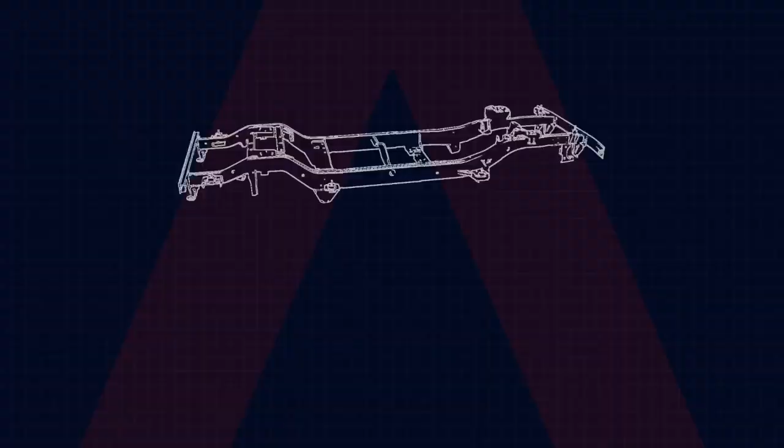INEOS say they're building the Grenadier using a classic 4x4 blueprint, so for them there was only one type of chassis to choose. A ladder frame is the only way to build a proper off-road 4x4. Ladder frames have been the basis for some of the most iconic off-roaders for over 70 years, starting with the Willys Jeep. So you could ask, why would INEOS use anything else?

We are not using a monocoque because we are not building an SUV. Strong, stiff, rugged and reliable, ready for mud, sand, rock and snow, and ideal for attaching extra equipment like heavy-duty underbody protection or winches, and anything else you need in the field. Well, that's the plan.

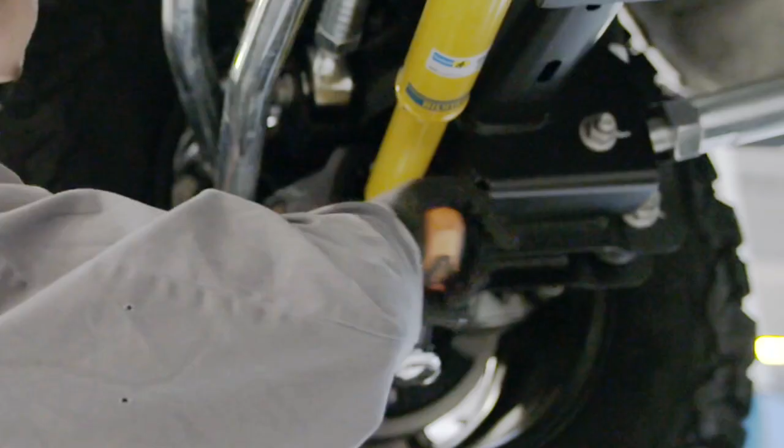INEOS is creating the ladder frame in partnership with a highly experienced vehicle manufacturing company with a proven pedigree of making ladder frames that can tackle the toughest environments. So the engineers are in no doubt at all: the Grenadier's skeleton will be a box section ladder frame. Now they'll happily give you a whole load of science and stats to explain why, but for mere mortals like us, the bottom line is absolutely clear.

The ladder frame is a super strong and really well-proven 4x4 platform that over decades has helped aid organisations, conservationists, explorers, foresters and of course farmers work harder.

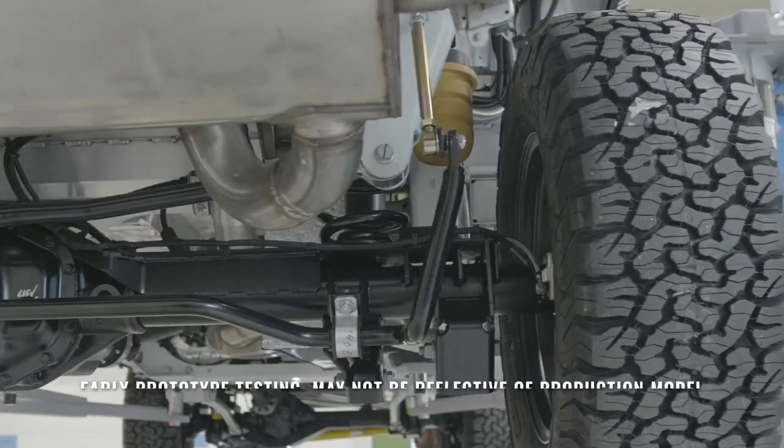For a 4x4 to get the job done, no matter how punishing the conditions, the Grenadier engineers feel that beam axles front and rear are essential. Beam axle is the most robust design we can provide for this vehicle.

INEOS looked long and hard for the right supplier for the Grenadier's axles. They chose Carraro. Why? Because of their long history building tough four-wheel drive vehicles, including tractors, making them the perfect fit for the Grenadier. As you can imagine, there's been a whole lot of debate about whether the Grenadier should have independent suspension or beam axles.

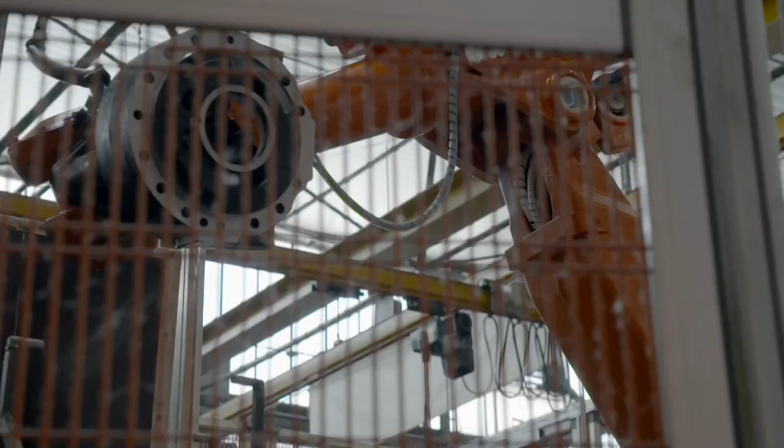Both setups, of course, have their pros and cons, but on balance, the engineers have decided that beam axles are going to be more robust, less vulnerable to damage, and ultimately much more likely to keep you going when the going gets tough.

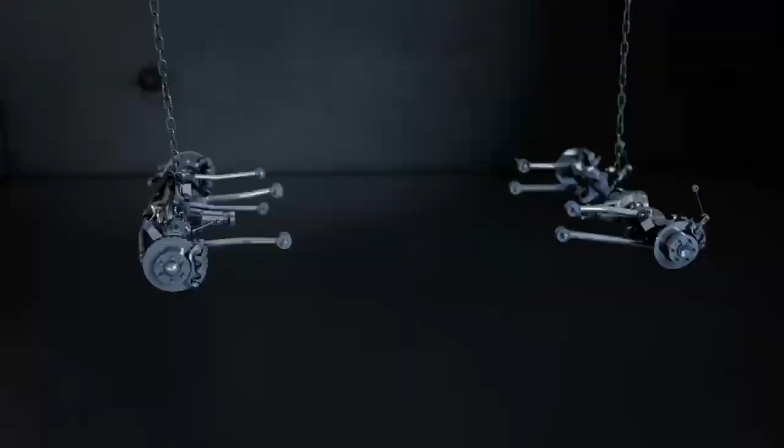Beam axles front and rear and a box section ladder frame - INEOS's vision for a no-compromise foundation to their ultimate 4x4. So the ambition is clear. They're starting with a blank sheet of paper. The Grenadier is being designed and built from the ground up. Every component chosen by engineers at the top of their game, and that's got to be very good news.

Join me next time when I'll be trying to find out more about the suspension setup.

The much talked about INEOS Grenadier is on its way, and I'm continuing my journey behind the scenes to find out exactly what the engineers are up to. INEOS has pulled together an international team of specialists to bring the Grenadier to life. There are around 60 companies already involved, and one of the key players is based here in Austria.

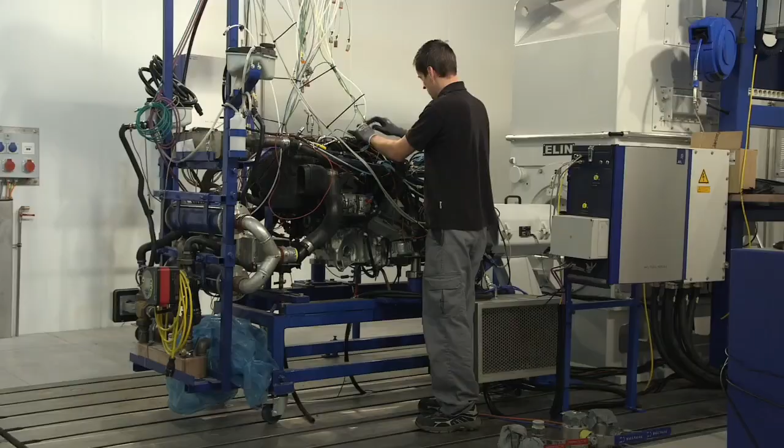Tractors, trucks, 4x4s - Magna has over a century of experience developing and building some of the world's toughest off-road vehicles. A good fit for this ambitious project.

It feels like there's a bit of a Grenadier takeover here. There are around 100 engineers working on the project and 15 in this design office, focused on creating a suspension setup that meets the needs of people who use their 4x4s for work every day.

People like Billy Milne, putting in the hard yards, looking after a large estate in the wilds of Scotland. The terrain is tough, punishing, challenging all year round. So Billy knows exactly what he wants.

An ideal 4x4 should be fit for purpose. It should be able to go where you want to put it, and it's got to have a good suspension system that rides through everything it's given. You want something basic, well set up, that does the job.

So there's a big expectation here: the best possible ground clearance, constant traction, and high axle articulation and suspension travel.

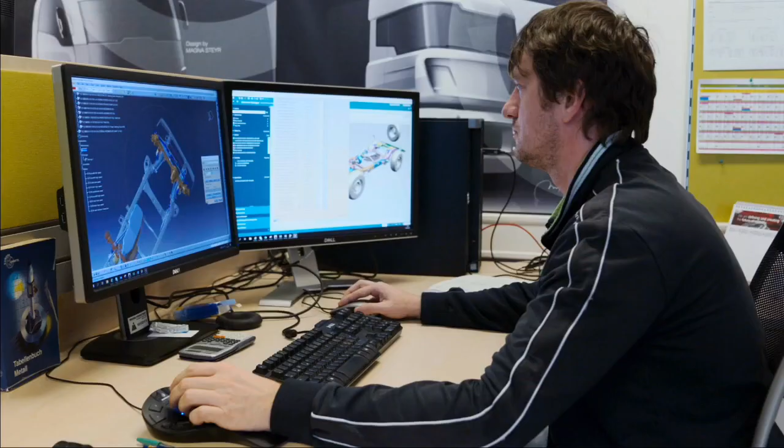So how are the engineers at Magna creating the ultimate 4x4 suspension? Well, by taking apart the world's most renowned off-roaders and benchmarking them, exploring three main options: leaf spring, coil spring or airbag, then using CAD to develop a theoretical new model that combines the best engineering ingredients to create something even better.

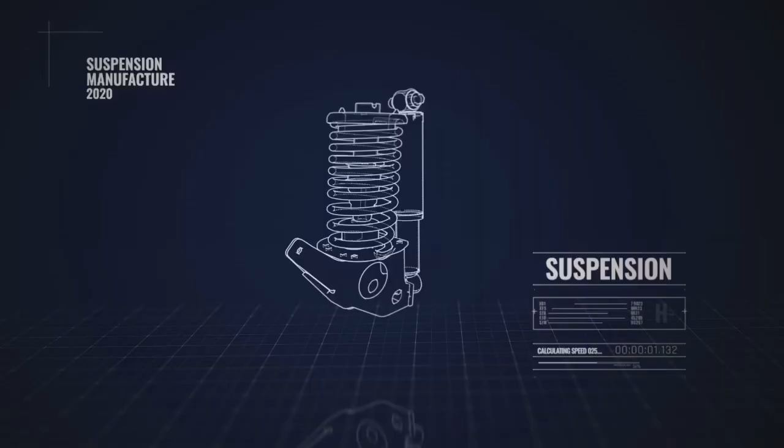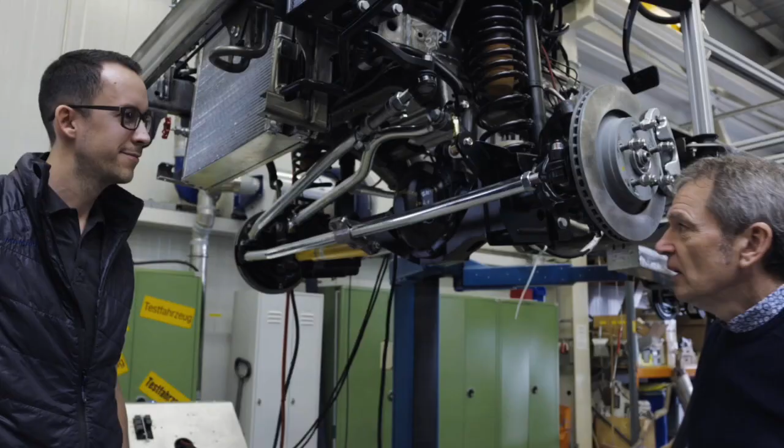And their conclusion? Well, there was only one way to go, it seems: coils and heavy-duty dampers. I met up with Magna engineer Matthias Mayer to find out more and to get an exclusive look inside their top-secret workshop.

It's brilliant to see the suspension actually bolted to a chassis, and this is the Grenadier chassis now. Yes, it's impressive, it is really impressive. You've clearly gone with coil springs here. Why? Coil spring is in our view the best option for this vehicle because we can have a progressive spring curve. This means the stiffness of the spring changes depending on the load.

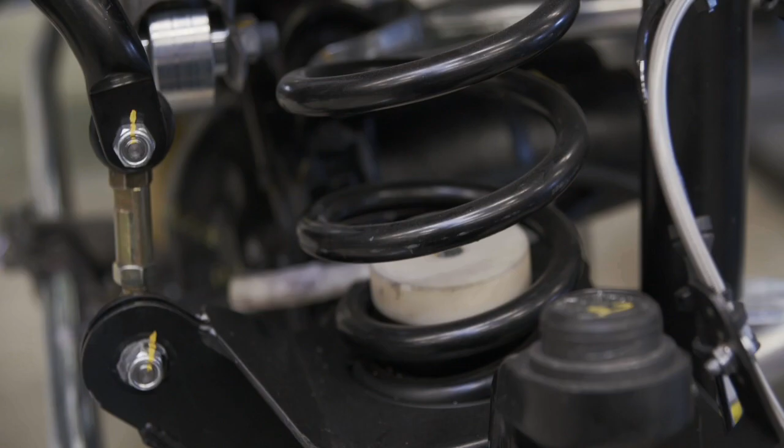Add separate dampers and huge energy-absorbing bump stops, and the engineers believe they've created a unique package. So, underneath, two really hefty big bottom links, and then two slightly smaller top links. That's right. This gives the stability against rotation in this direction for brake torque and so on, and also good stability during driving.

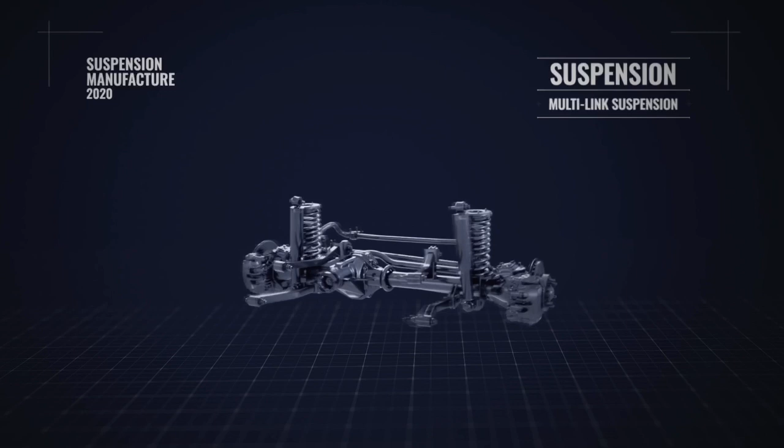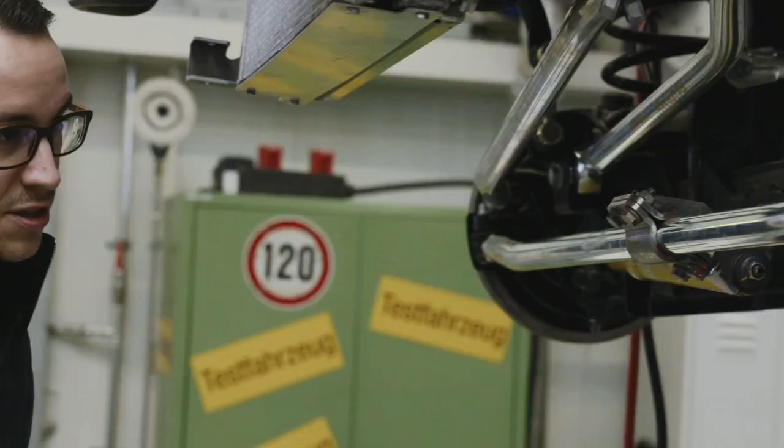These four really strong links help stop the whole axle twisting or moving forwards and backwards. Back in the front then, we've got one link here, the panhard rod, that goes from the chassis over here to the axle, and its purpose is guidance in lateral direction. So to stop the whole axle moving from side to side. You have to be strong because more or less the whole axle load in lateral direction is guided by this link. So this has to be massive.

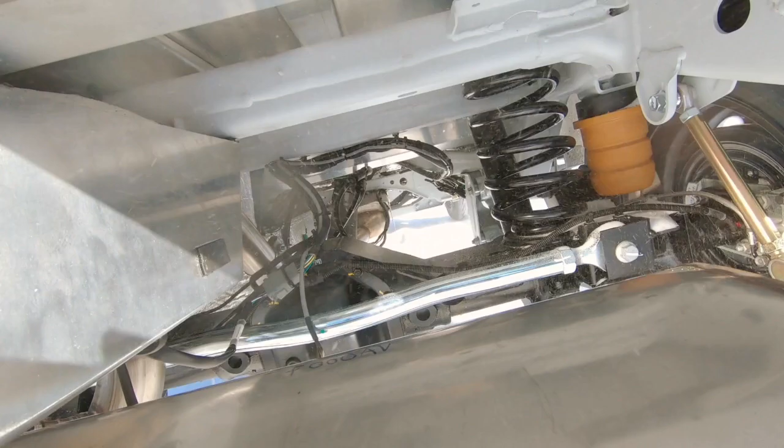And it's the same setup at the back. Where have you got to now in terms of developing the final suspension for Grenadier? Yeah, so we have a great prototype setting now. We have great ground clearance, very high distortion angles on the axle itself. This enables good traction on every off-road terrain you can think about. And of course we have real high wheel travel. This enables good drivability even in empty condition and also with a trailer on it.

There's no electronic control on this at all, I'm assuming. There are no wires anywhere. Yeah, so it is completely free of electric components, to be robust, to be easy to maintain, and also to have easy access to all parts.

I tell you what, after months of only being able to look at computer-generated models of the suspension, it is so cool to finally be able to touch some real parts. But these are prototypes, of course. There's a whole heap of testing and fine-tuning to go.

There's a bloke in Scotland, I know, who will be desperate to get his hands on this stuff and to show it a bit of good old-fashioned Highland hospitality.

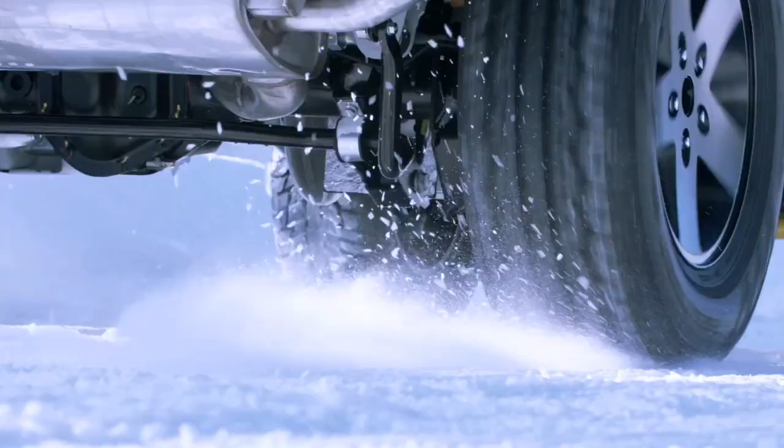Hopefully they will get it right. And if they listen to the people out there that are working the ground, working the land, and need a good rugged 4x4, I hope they get it right.

I hear you, Billy. Clearly building a rugged 4x4 is a huge challenge, but getting it right is exactly what INEOS are focusing on. That's why they've got the best people working on it, and I have to say, their confidence is impressive. I promised you exclusive access behind closed doors. Well, there you go - you're the only people who've seen that.

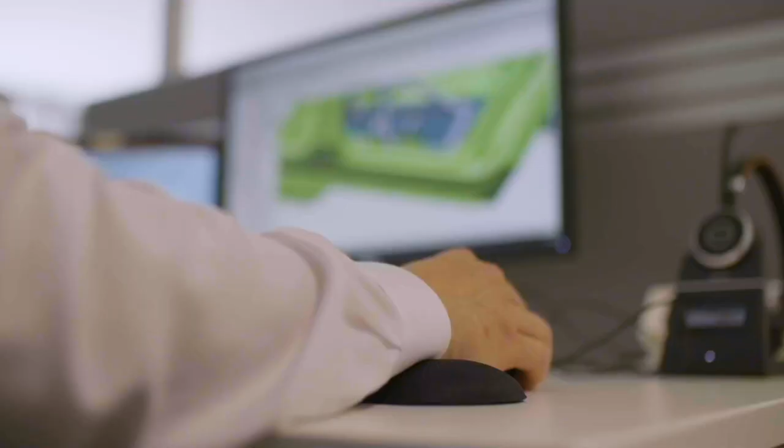Can you give me any examples of where it's been tricky? Every shape that's created on the front or the rear of the vehicle must respect the approach and departure angle. Otherwise, as you quite rightly said, people will not see this as fit for function.

Essentially, the Grenadier's base is going to be in Wales. Why Wales? Well, we wanted to be able to create our own identity. What we wanted to do was have our own facility. We didn't want to take somebody else's. We wanted to create something specific.

Oliver, it's great to see you. What are the really big challenges to conquer from your point of view? You have the digital engineering done, but now you have to actually put it in the physical world, and this is ahead of us.

Dirk, thank you very much for finding some time to speak to me, I know you're a very busy man. So what stage are we at now? Coming out of COVID, coming out of that crisis, we have lost some time here and we need to make it up. We are not jeopardizing the quality, so we need to find ways of testing very hard, very rigorously.

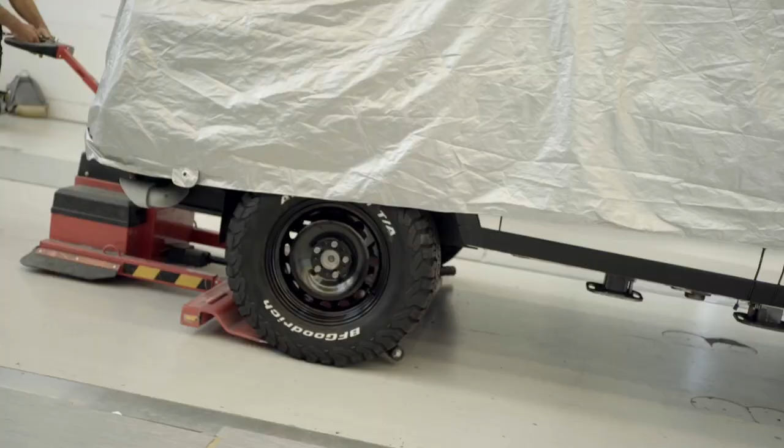Revealing the finished look of the car so early in its development, most manufacturers wouldn't dare do that. I think because we're not really restrained in the way that a big manufacturer would. We don't have to protect an ongoing line of vehicles. You know, the view is that we just need to be really open about it.

We'd much rather get the actual car out there, test it. Like to be nice and open. Why wouldn't you be? The story about a pub in London, the Grenadier, a bunch of blokes having a few beers and coming up with this plan to build the ultimate off-roader.

Is that really what happened, or was it a much more conventional brief to you? No, it pretty much was exactly that.

It seemed that the sort of last of the proper utility vehicles were about to stop. There was a character about them that we all kind of felt we were going to miss, and you look around and there was nothing that was really very appealing, and Jim being Jim, let's do something about it.

And as we basically worked out what it was about the character of these older vehicles, what was the DNA that gave it that character, and as we understood more, you start to see why these vehicles start to look in the way that they do.

We didn't sort of set out to make it look like anything else. It was always sort of engineering led. Function always wins. Where did your influences come from in the way you creatively thought about the design?

Right at the beginning I remember saying we've got to design something super practical, really well built. If we can think of it in these terms now, all the rest of it gets kind of built onto there. If you look at any of the older, the Pajeros or the Nissan Patrols, the old Defenders, there's a real kind of easy to understand sort of visual on them.

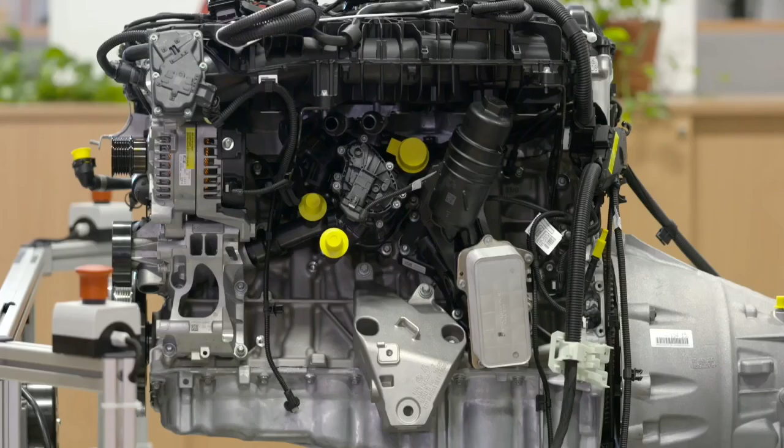In the last episode, you got to see what the Grenadier will eventually look like. Now's your chance to hear it and see it undergoing some of its preliminary testing. I'm back in Austria to catch up with the engineers responsible for developing and testing the Grenadier's powertrain.

And that is actually a lot steeper than it looks.

Early prototype Grenadiers called 2As are being used to specially calibrate petrol and diesel variants of the same BMW 3-litre 6-cylinder engine. The tuning and testing programme is being led by engineer George Fuchs.

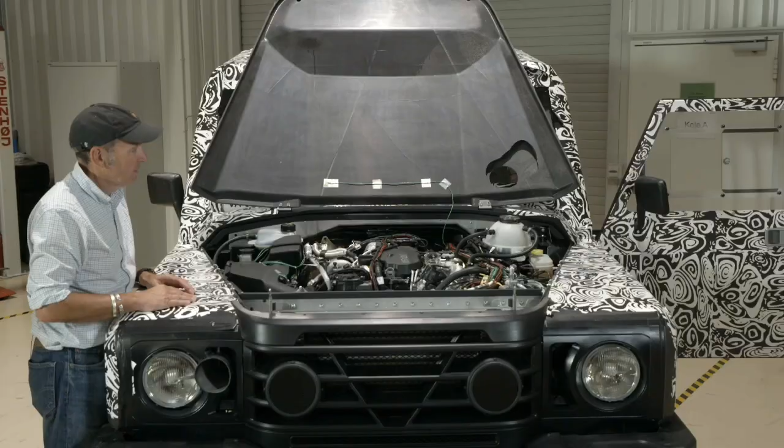That's cool, it sounds really smooth though. So the two engine options are going to be what, just to clarify? Here you can see the diesel version, and before on the test track you have seen the petrol version. Both are 3-litre versions with 6 straight cylinders.

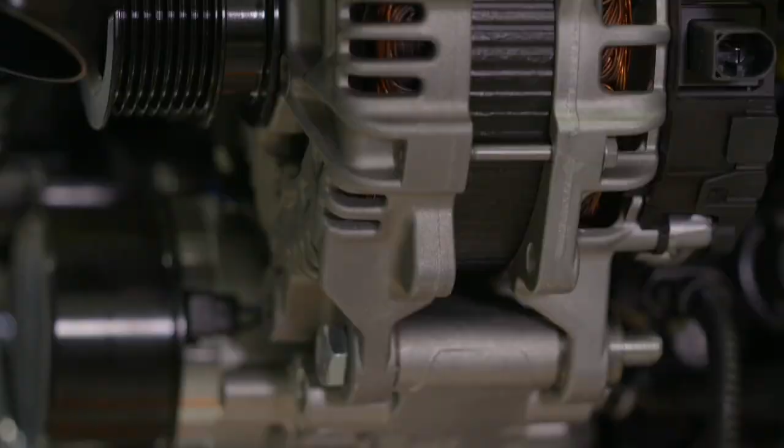Why take an existing engine that's being used for a different purpose off the shelf and modify it, rather than just build a brand new engine from scratch? We know we can count on the BMW one, we fulfill all emission standards on every market. We know we can adapt this engine for the use of the Grenadier project. The most important thing is to have a high amount of torque at low engine revs. We need a robust engine, one we can count on, because we need to be flexible and have a high amount of torque and power, to be able to bring up the vehicle, also with a trailer, for example, up the hill.

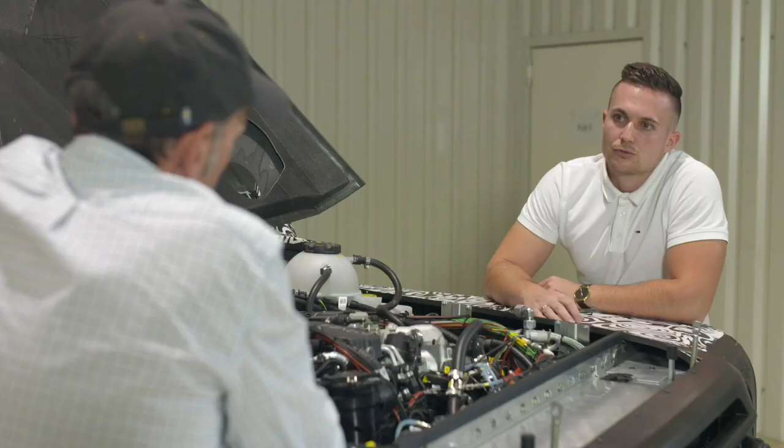How hard is it retuning, recalibrating either a diesel or petrol version of this to make it the right engine for Grenadier? We need 2 to 3 years of calibration activities. So we have several loops, winter testing, hot climate testing, emission testing and so on.

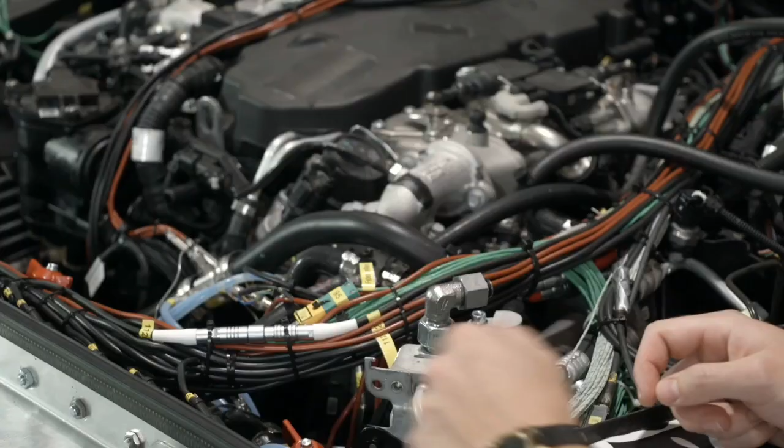So in terms of calibration then, what are you actually fiddling with and changing when you're calibrating? It's a mix of all components which are relevant for the engine, the air intake system, then you have cooling temperature, fuel supply, the exhaust system. Here you can see in front, approximately 12 pressure sensors which are measuring the pressure in the fuel supply, in the cooling system and so on.

Where's the data capturing equipment? In the back of the vehicle. All right, okay, now it's looking complicated. So what are all these boxes? On the left side in green color you can see all the temperature measurement points, and to the right the flow rate sensors and the pressure sensors. And so then all that lot hooks up to one laptop? Then we check it after every test.

So you guys have already done extensive testing, 18 months or so. How much more have you got to do? Approximately 1 year is left, and in total we will travel 1.8 million kilometers. That's a lot of testing. Yeah.

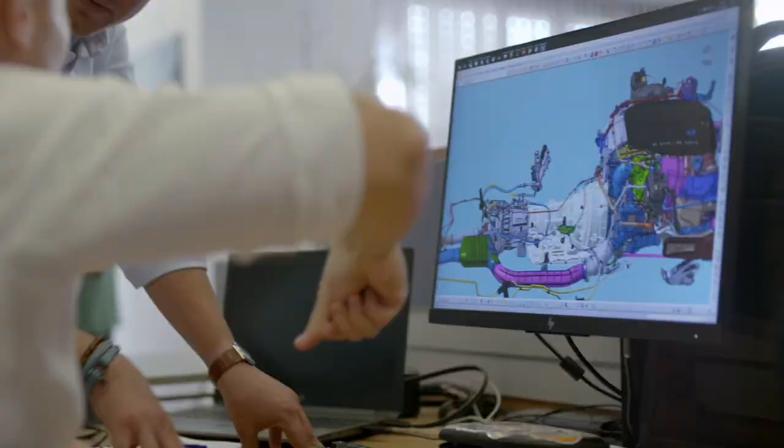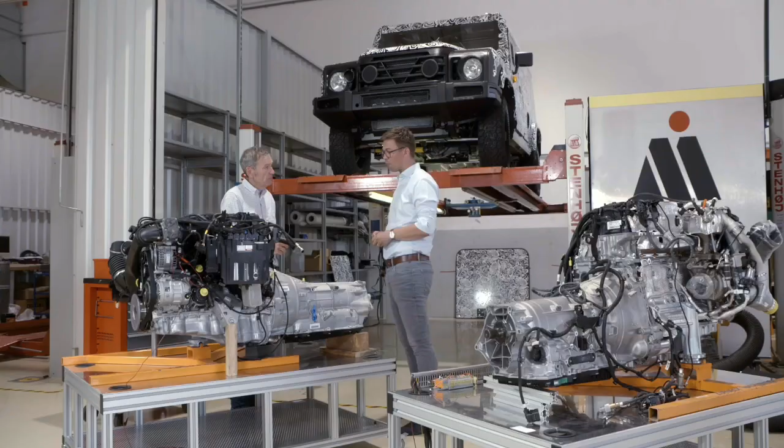Will there be a manual option? No. Why not? We've reviewed all the options and we believe that the Auto is the best option. It offers the full suite of functionality for the experienced drivers but also for the inexperienced drivers. These are both a ZF 8HP, 8-speed automatic transmission with torque converter, fully electronic control, best in class, definitely.

And in terms of the features in it that make it better for off-road use, for the kind of customers who are going to end up driving these vehicles? Oh, definitely. It has a torque converter which prevents stall and increases torque. There's a manual mode for the enthusiasts to select their gear and keep that gear, or keep it in drive for the inexperienced drivers.

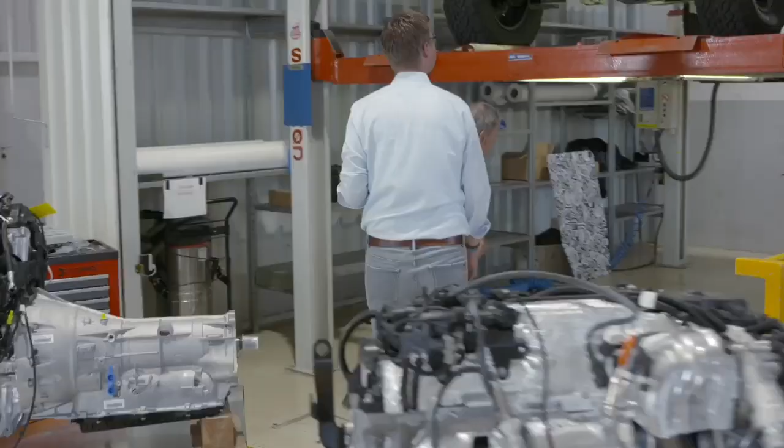So the transfer case, this has been a big part of the powertrain development for Grenadier, hasn't it? Yes, it's massive. We've developed a transfer case from a blank sheet of paper. Why was that so important for this project? This is the part that makes this car a 4x4. If you don't have the transfer case right, then your off-road performance will not be as good as it should be. We are targeting to be best in class, so the transfer case needs to be that too.

So what essentially is unique about the transfer case? The fact that it's permanent 4x4. There's not many manufacturers doing that.

Most manufacturers choose permanent rear-wheel drive and let the user select 4x4. We've deliberately decided not to do so. We want to offer our customers this experience - you're driving on the road, you decide to make a detour through the countryside. There's no complex switches and buttons to be used, or need to stop to put it in 4x4. You just take the corner and you've got drive on all four wheels.

In terms of operation though, this is a manual selection, yes. High and low range. Correct, so it's manually high and low range and manually diff lock. That was a deliberate decision again. The manual shifting system is rugged, it's durable, and it's also very well serviceable in the field.

Where are you with the current development? We're building 100 plus full vehicle prototypes. So we've moved from component testing into system testing, and now we're going to do full vehicle testing. So for the next coming year and more, there's going to be a whole bunch of cars running around the whole world.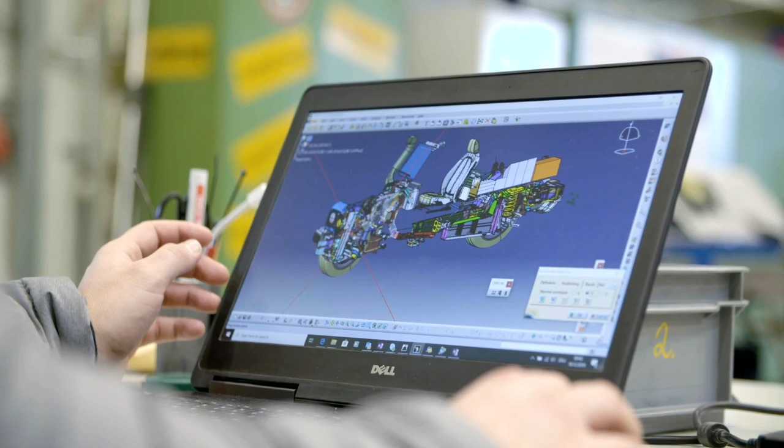How does that feel for the engineering team at INEOS? It's Christmas. It is, because you've been working on virtual components on a computer screen, and for every engineer that's a magic moment. But also a new phase in the program, because now you're going to put these components through their paces. It's going to be an exciting period.

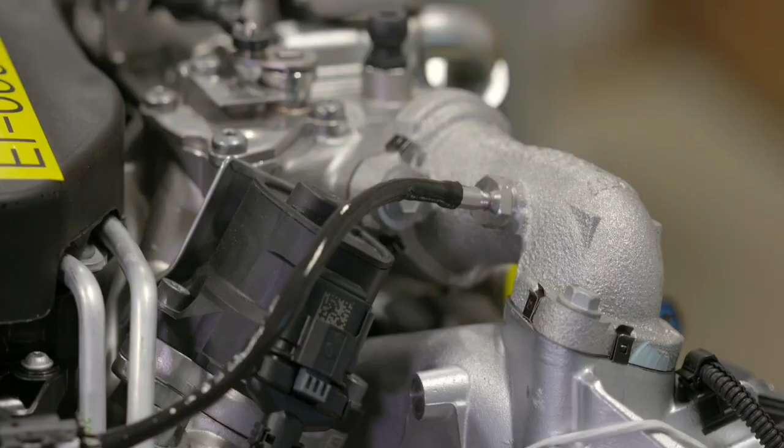So, to recap, the Grenadier will launch with diesel and petrol options of the same proven 3-litre straight-six engine, hooked up to variants of a best-in-class 8-speed auto gearbox with driver override. The transfer case, being developed from scratch, promises full manual control.

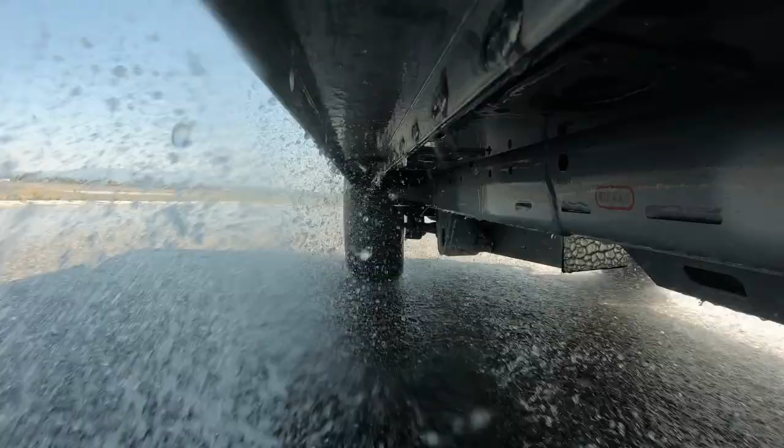INEOS has clearly never made a tyre, never made a wheel before, so how did you go about developing what is a unique bespoke package for this vehicle? So we started the selection process more than a year ago with some tests on our first prototypes, and after the evaluation of these tests we nominated Bridgestone as a capable but also a very willing supplier. The Grenadier will come with tailor-made Bridgestone tyres as standard. INEOS believes Bridgestone is the perfect tyre partner.

The company has nearly a century of experience, plus the necessary global network to support a 4x4 built for the world's most remote places. Tyre options will include, for people who want something more aggressive, a BF Goodrich tyre option.

The standard tyre is the one that you, Andy, at Bridgestone are developing, which is this. Now this is a demo tyre, it's because you walk up and go, it's a little bit small. But it demonstrates the tread pattern.

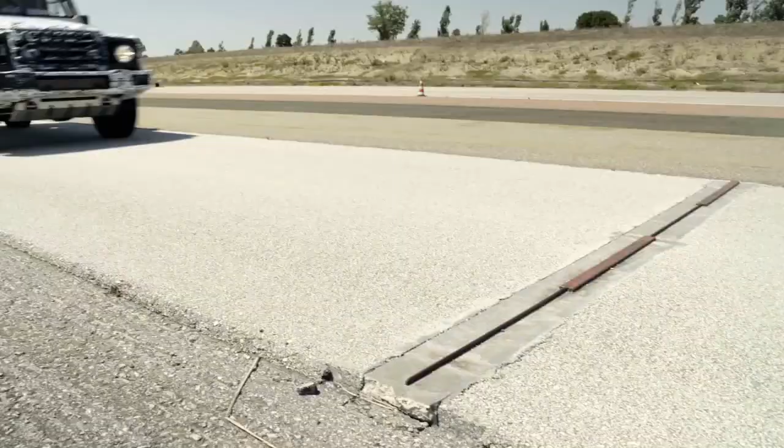So you're saying you've got a tyre you've already developed, it's been proven and tested, but you're then kind of up-speccing it specifically for the Grenadier. Absolutely. We've changed the compound so it's got better off-road performance, particularly in the snow, and we've changed the construction slightly to make it more tuned, which particularly helps with the steering in laden and fully laden conditions with a trailer.

Lots of people, when buying cars, have a perception that standard means second best. That's not the case here, is it? Absolutely not. We've worked really hard with the Grenadier team to make sure that what is offered as standard fitment is absolutely what's required for the vast majority of people running the Grenadier. The package we've put together with the wheel and tyre is snowflake marked, so it performs as well in the snow as it does in the mud, and it's great on-road as well.

So let's just focus on the rims. From a materials point of view, is the reason you've gone for steel as standard as obvious as you might expect, that it's incredibly robust and you can beat it with a hammer if you bend it? It has to be robust for a car, but also durable, and steel wheels are perfect for use in winter and also for hard road conditions.

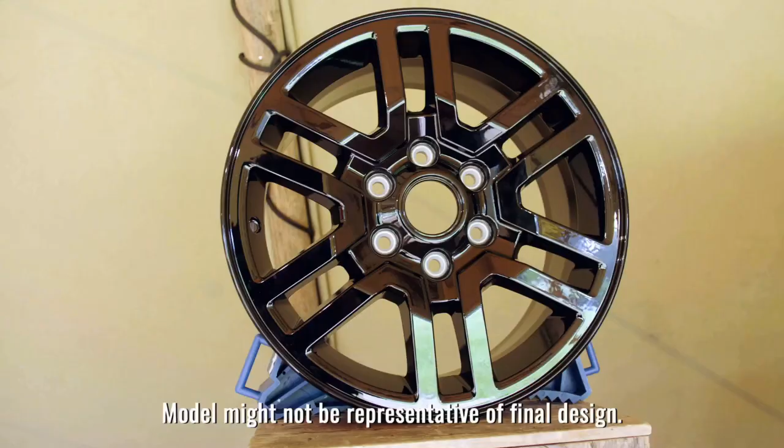From a sizing point of view, you've gone for 17-inch and 18-inch diameter rims. Why not 16? In terms of brakes, we had to respect a specific package to perform as expected, and clearly the 16 didn't fit for our brake system, so that's why we didn't go with 16 inches. Wheel options will be larger 18-inch steels or unique alloys in both sizes, all fitted with the Bridgestone tyres.

All right, what's been your general feeling? It's just like ticking boxes: good engine, reliability, tech, automatic gearbox, reliability, tech, transmission, it's all there, all the axles. The way the body's built, put together, the big doors at the back, it's all there. You see it on all the social media posts, the previous videos, we've all watched them, but actually to come here and see it and measure it up against what we were expecting - it's a very exciting project, and I can't wait to see this thing out on the road.

When you're trying to make a vehicle like this, the ultimate off-roader that's going to be used in incredibly varied conditions - that's a hell of a thing to try and create in the automotive world. Do you get the sense this is a compromise? No. This is the vehicle you want for the next 20 years. You're just trying to make your vehicle as reliable as possible, because there's nothing else out there at the moment to replace it. We keep utilising older and older vehicles because there's nothing there that I feel can replace what I've got at the moment.

And then coming to have a look at this, it's looking pretty good, to be honest. It's nice that standard is on steels though. Car manufacturers are constantly pushing alloys on you. Steel wheel's fantastic, it does what it says on the tin. That's what a lot of people are going to want out of this.

How many of you have bashed out a bent steel wheel with a big hammer? Yeah, a few times, sitting there with a sledgehammer smashing it back on, putting it back straight. Oh yeah, it's a little bit buckled, but it'll be all right, blow it up and off you go again. It works, doesn't it? It works every time, and it gets you home. Exactly, it'll always get you home.

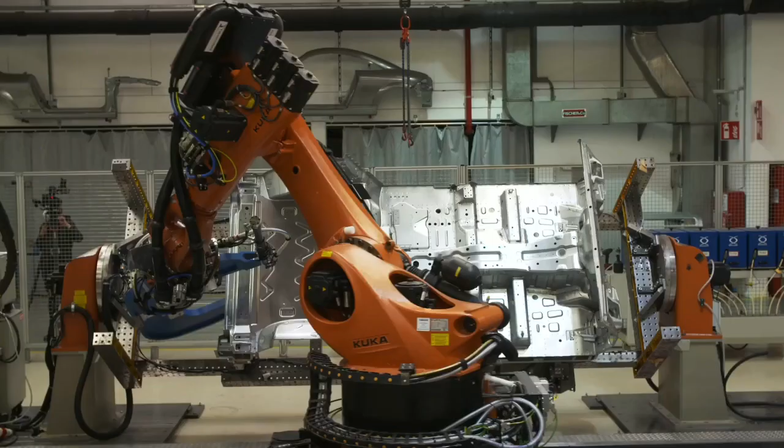So things are really ramping up now. In this episode, I want to take you behind the scenes of the new prototype production line in Austria and a first look inside the factory where your Grenadier will be built.

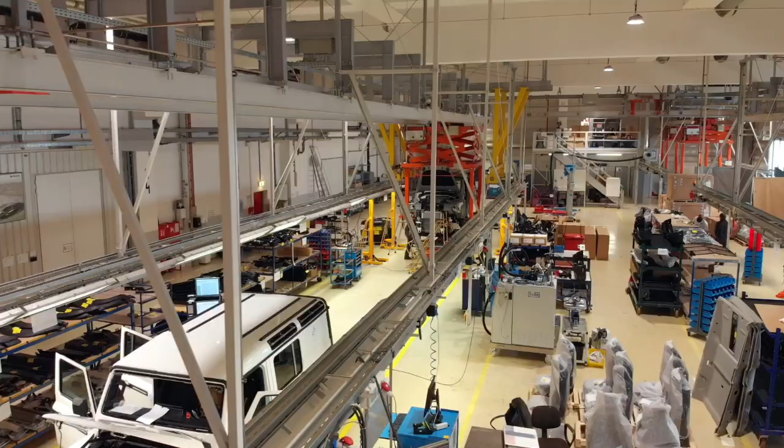After more than a year testing early development vehicles, which they call the 1As, the Grenadier project has reached a major milestone. INEOS Automotive's engineering partner in Austria is now building a fleet of much more advanced next-generation prototypes. You guessed it, the 1Bs.

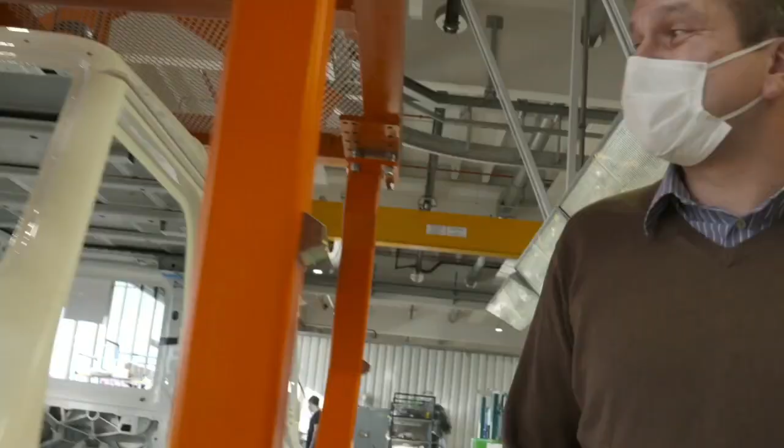Hans-Peter Pessler is the engineer in charge. We have around about 250 engineers working on this project, so everybody is pushing forward very hard because it's a big challenge. You've got loads of experience in the automotive industry, building cars for all kinds of big companies. What have been the real challenges that Grenadier's thrown at you?

The first challenge was to understand what INEOS wants to have, so to get their ideas into the paper, into the sketches, into the computer, and then finally into this car. We are very happy that we have these 2A vehicles right now, and the next big phase is the 2B. And how many? Round about, let's say, 80 plus.

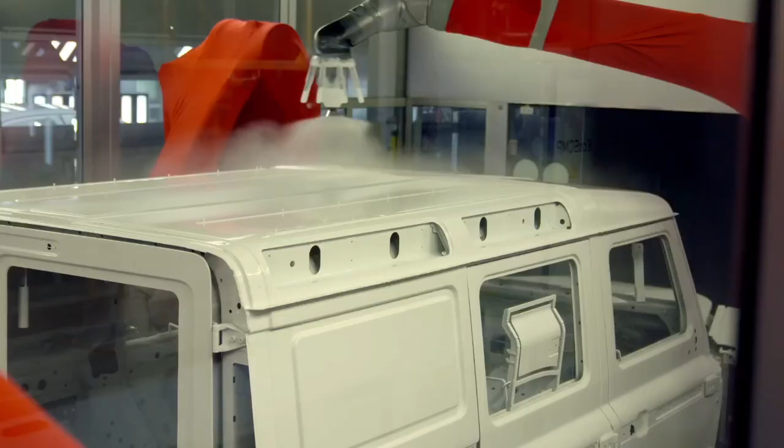Welcome to the Grenadier's first small-scale production line. It's been created not just to build the limited run of new prototypes, but also to test and perfect every stage of the process, from start to finish. Experience gained here is helping the team plan the path to mass production.

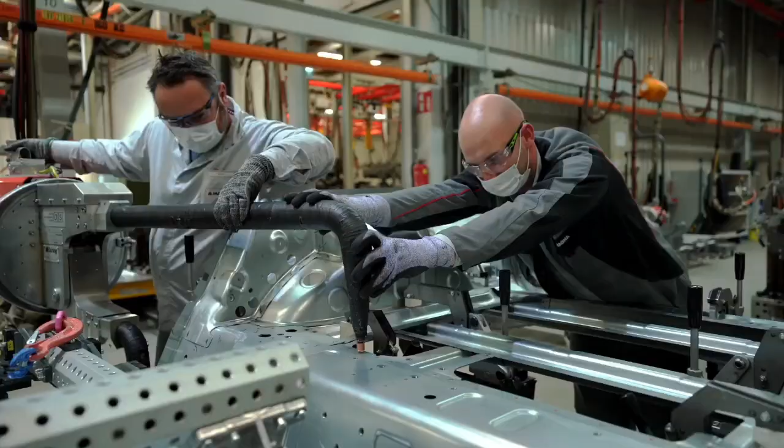Each Grenadier is built from around 350 individual panels, a complex 3D jigsaw held together by glue and weld. The doors and closures are aluminium. The rest of the body is galvanised steel.

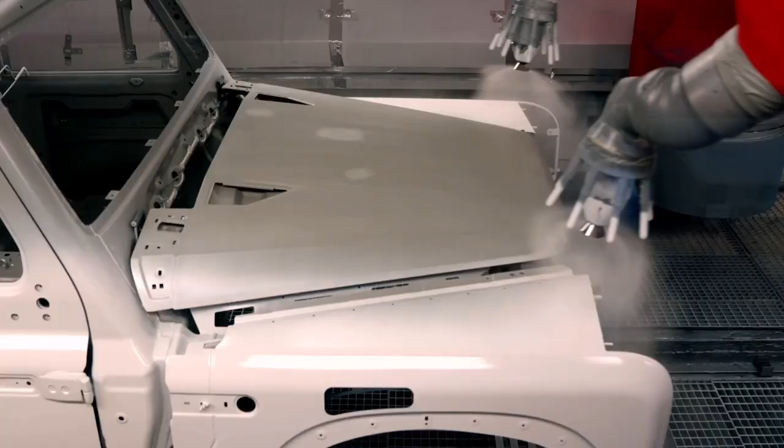The shells are protected with 4 coats of paint applied in a 7-stage process. Most will be white, black or silver. A few will have contrasting roofs. All the chassis are powder-coated white to help detect cracks during testing. Axles and powertrains are supplied pre-assembled, the majority left-hand drive.

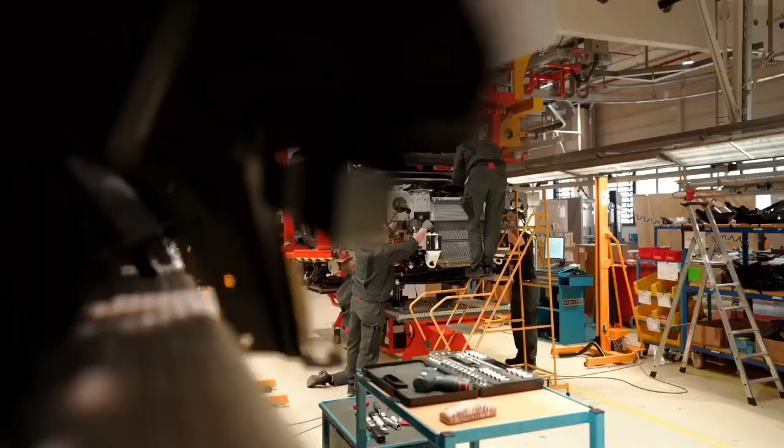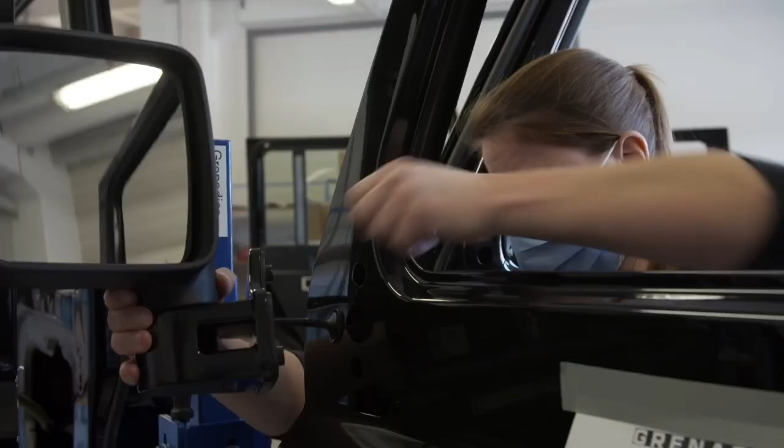It takes just over a month to build each prototype from scratch, but there are 8 vehicles in build at any one time. When they leave here, these 2B prototypes will be put through extensive safety and performance testing. Some are destined for high-tech automotive science laboratories. Others will be shipped around the world to see if nature can break them.

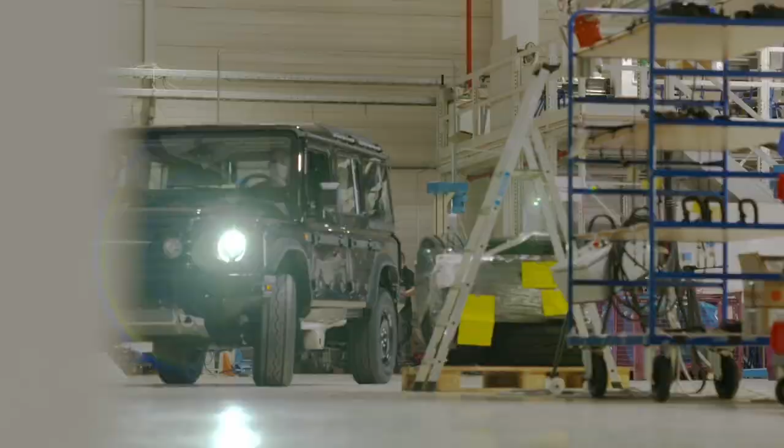Lessons will be learned, of course, and the Grenadier will continue to evolve over the coming months. Yes, it definitely looks the part. Now the engineers must prove it can get the job done.

Now, as you may know, INEOS Automotive has bought a manufacturing site in Hambach, and it will be the home of the Grenadier. So I thought you might like to take a closer look.

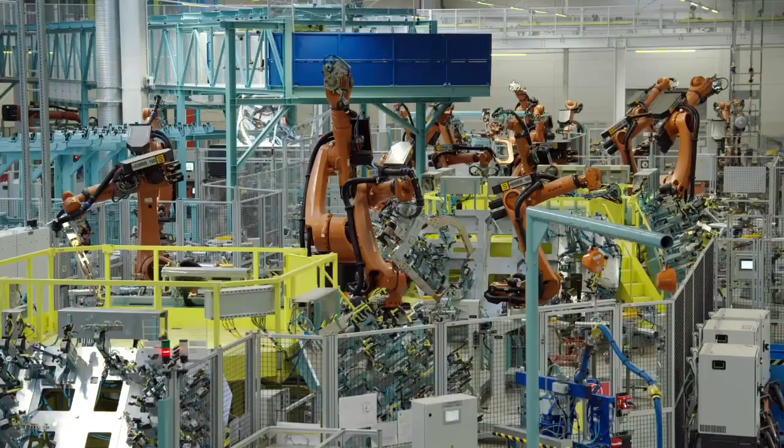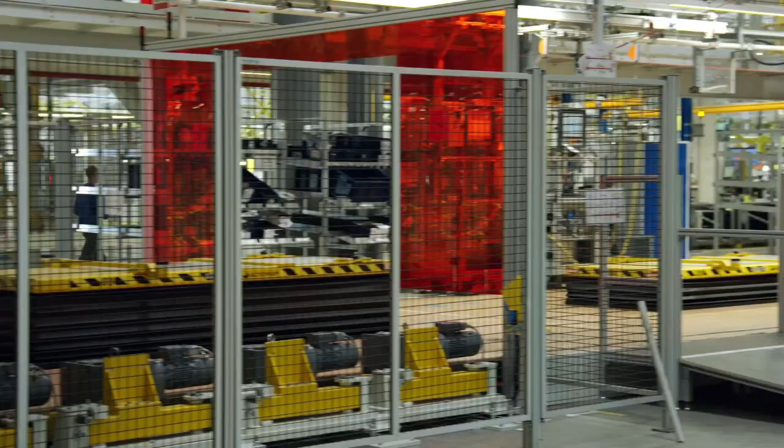It's a massive facility, one of the most advanced vehicle assembly plants anywhere in the world, thanks to the 500 million euros invested in it by Mercedes-Benz. Packed with state-of-the-art technology, it comes with a highly skilled team, all trained to Mercedes' exacting standards. The fully fitted factory just needs repurposing and reprogramming to build Grenadiers.

And this is the man getting the job done. Obviously, Eric, there's been a lot of discussion about where Grenadier's factory will be. Why did you end up in Hambach? We looked at several sites throughout Europe, and then this was a unique opportunity where Mercedes had a change of strategy that coincided with us looking for a plant. And the blessing here was that Mercedes has actually designed this plant for full-size SUVs.

So very much a commercial opportunity then that you simply couldn't turn down? It's not only commercial, I would say, it's a whole package. It's production cost, but it's also quality and capacity.

So what have you actually got to do to get the facility ready for Grenadier? You can say that you have maybe 3 categories of work that needs to be done there. We have some cells where we just need to change some fixtures, reprogram the robots and so on. And we have some cells that need to be rearranged. These are modular cells, so maybe some robot needs to be moved from one place to another. And then you have the 3rd category where we actually tear the whole cell down, and then we rebuild it. All of that is done in the body shop here behind me.

In terms of quality control, what are you doing to make sure that Grenadier is fit for purpose and is going to be built to the reliability and quality standards that we as customers will expect? We have a very advanced, well-equipped quality department here with very experienced former Mercedes quality people. And the focus is really based on the workstation, to make sure that before a vehicle goes from one zone to the next, the people actually working in that zone ensure that the quality is correct.

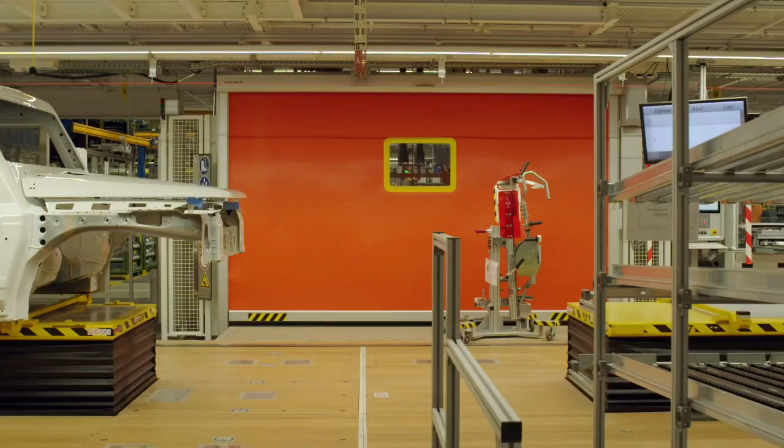So from where you're sitting right now, what are the big challenges coming up? So the next step is you build the 2Bs, which are not production intent material, just to make sure that the vehicle goes together and you learn how to build the vehicle from that. Then we go into the next phase, where we start to build prototypes using the actual production process. Then you ramp up the production up until the speed that you want to run it.

Listen, Eric, thank you very much for your time.

Thank you, appreciate it. So the most advanced Grenadiers yet are now rolling off the prototype assembly line. And having taken over the existing high-tech factory in Hambach, INEOS engineers can now focus on refining the build process for mass production. So some very big developments. See you next time.

Rugged, robust and reliable. That's what we want and that's what we've been promised. So how are the INEOS engineers ensuring they deliver? Welcome back to Building the Grenadier.

Well, the answer is an unrelenting obsession with testing. And that's the destiny of around 100 latest generation prototypes, the 2Bs, that are being built by Magna in Austria. Some are already being evaluated in super high-tech laboratory workshops, others shipped around the world to be punished in some of the most extreme environments on Earth.

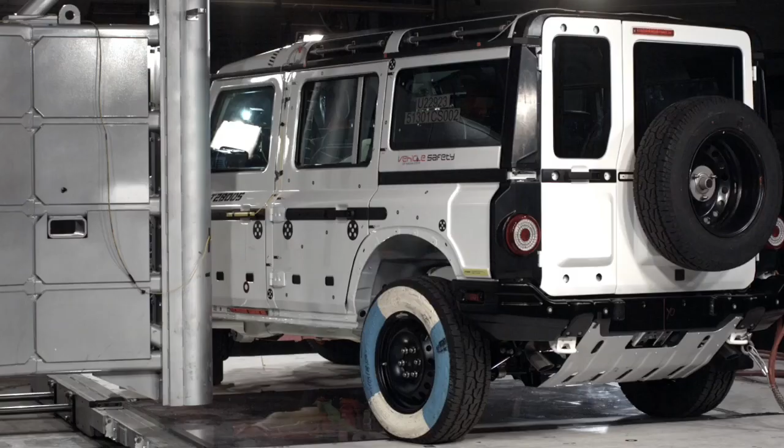Oliver, talk to me about 2B testing. Our main purpose at the beginning of the testing was really to validate our concept. You can develop something on the board and on the computer, but you really see for the first time when you're sitting in the vehicle, when you're crashing the vehicles, does it really come together like planned, like simulated? We are really satisfied with the results from our hardware testing till now. They are very close to our simulations, and that is always a good sign, because that is the starting point for further developments and further improvements.

The first part of the 2B testing programme has already been completed successfully. In Sweden, drivetrain and safety systems have been evaluated in sub-zero conditions on snow and ice. In the Alps, the Grenadier has been put through its paces at high altitude.

In terms of the whole package of field testing, the figure that's always been in my head is this 1.8 million kilometres of testing. Is that on track? At the moment, all the testing is ongoing. We have a plan with the vehicles - they're running those kilometers, on-road and off-road. We have 1.8 million as a final goal, and we will ride more than 300,000 off-road kilometers out of that. Probably we are 20 to 25% through at the moment.

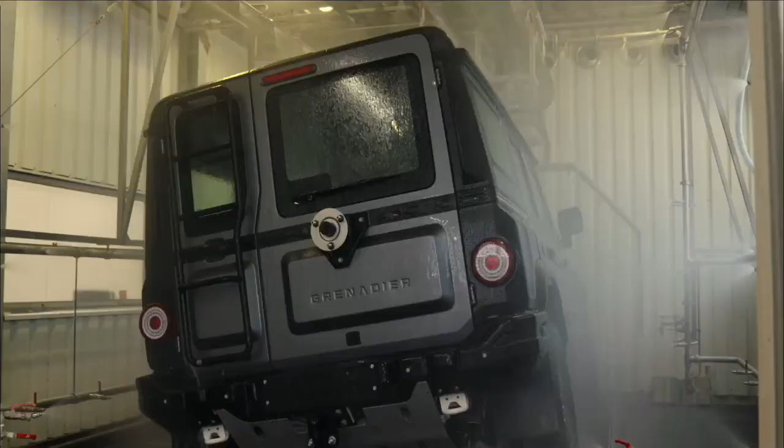Right now we started our rough road durability testing. We have our water tightness program, a corrosion protection program, and then we continue with our winter testing behind us, preparing now summer testing, preparing high-speed testing, and looking forward to the remaining program of the 2B vehicles.

Give me a sense of geographically where testing is going on. We're testing in more than 15 countries at the moment. We choose the countries with the most challenging environments. We will test in Austria, Germany, Italy, Spain, South Africa, Namibia, Sweden, Iceland, United States.

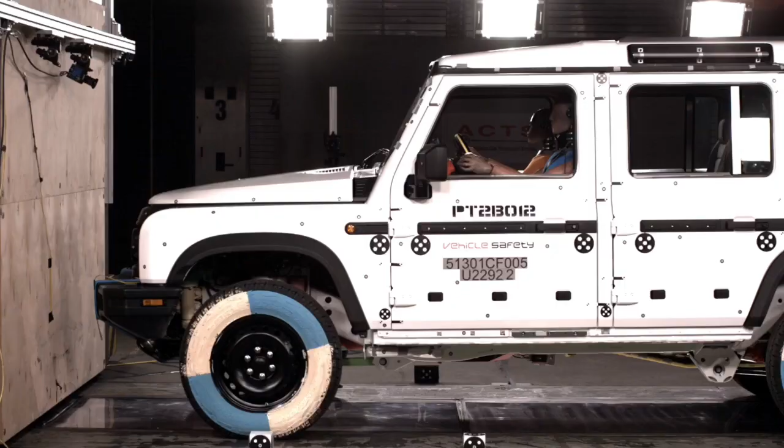Has there been any learning from the testing, Oliver, that's fed back into the engineering and development teams that's actually made a difference to what customers will end up getting? Yeah, absolutely. If we talk about very good results in the crash tests, we are able to improve the behavior of the airbags. That's feeding back to our engineers, and they keep improving on those topics. We found out pretty early, at the beginning of our 2B program with our chassis tuning vehicles, in regards to drivability and stability, that we will adjust our axle geometry a little. That is going on through all the vehicle, starting with the chassis, going through body in white, testing of interior, and everything is done to improve the maturity of the vehicle when we go into serial production and at the end in the customer's hands.

The balance between on-road and off-road, there's always the concern, surely there has to be a compromise somewhere - it can't be brilliant in both places. We have a promise to build one of the best off-road vehicles in the world, but we are also aware that probably the vehicle will see more kilometers on-road than off-road with our customers. So we need to make sure that you have a very good on-road performance, and for sure we keep our promise to have a fantastic off-road performance.

So Oliver, are you on schedule? We have some delays, no major delays, but with everything going on in the last 12 months we have some delays. It was clear in our organization we will not compromise on testing. We have our testing program and we will go through all of it without taking shortcuts. We will stick to the plan to deliver our product to our customers.

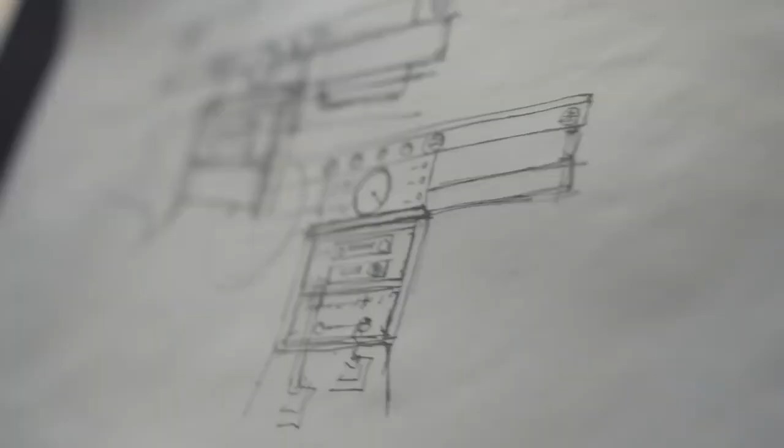Both ends of the scale have merit. To have something very simple, easy to maintain, analog and logical was really our starting point. But equally at the other extreme, why shouldn't you be really comfortable, and why shouldn't you be warm? I feel like we've found a new spot in between those. Hopefully we've got a really good balance in the middle.

It must be nice though to be able to take the dogs for a walk and not have people shouting across the field, 'Oi Toby, when are we going to get to see the inside?' Yeah, that hasn't stopped.

I've got to say, first thing, you have completely nailed these seats, haven't you? Yeah. Are you comfortable? I'm not used to this level of comfort in my 4x4, let me tell you. They're really, really nice seats.

Some people are going to spend an awful lot of time in here - this is their office. So why wouldn't you at least be comfortable and warm and dry? Which was always our kind of mantra from the start. Again, it is unique - you do not see this kind of switchgear, overhead panel. This is different. Having the central stack means that everybody can be engaged in the whole process of driving and the journey.

Inevitably a big screen, but what's it for? Given that this vehicle has far less in the way of electronic control systems, you can choose what goes on there to a degree - you've got all your performance info, but then you've got your entertainment stuff through there. You've also got all your off-roading settings. So would this interface include sat-nav and all that kind of stuff, or are you basically moving towards a world which says we all carry the computers around with us all the time as a phone?

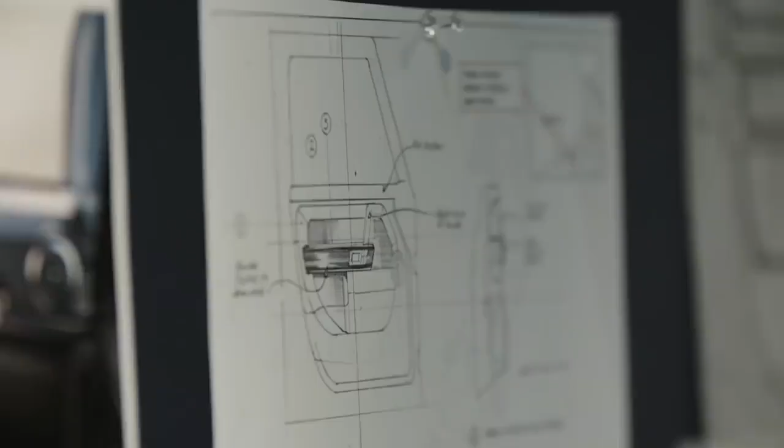How many sheep can you get in the back? Well, lengthwise, you're going to get one in, but 3. 3, good, excellent. Overall, I tell you, the big thing, you get a real sense of the amount of thought that's gone into this, but also the number of things you've had to think about. It's almost as much as the exterior, I think. We've been really brutal in drilling down into what you really need, what you don't really need. It's a pretty close match to some of the earlier first thoughts, really. So yeah, very, very pleased.

So was the wait worth it? Well, I'm sure you'll let Grenadier know, but if you already like it so much you want one, well, good news - I've just heard you'll be able to reserve one from October. See you next time.

We know what it looks like and we're excited by how it's being engineered, but what is it like to drive? Welcome back to Building the Grenadier.

I've come to check out the Grenadier Prototype Tour. It's a global series of experience events that gives the likes of you and me the chance to get up close and personal with the Grenadier almost a year before it goes on sale, and that's incredibly unusual in the motor industry. But INEOS Automotive says that being so open now, whilst the vehicle's still in development, is absolutely critical to it delivering the kind of off-road utility vehicle that customers around the world are crying out for.

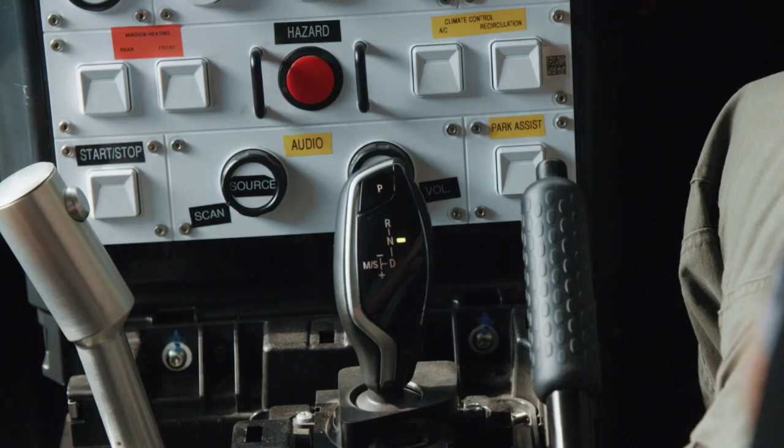This gearbox is totally seamless. It will change gear much more accurately than a human being, to be honest. However, if there were enthusiasts who like to use the gears and want to override the gear, well, you can do that as well. You can Tiptronic it and then tell the gearbox what to do. So it has the best of both worlds.

If you look at the future terrain, we've got quite a steep descent coming up. I can literally just drop it into first gear on the Tiptronic. So we're in first, low, centre diff lock. Yeah, and foot off everything? Off the brakes, foot off everything, and that's got perfect vehicle control. And that is gold standard as far as I'm concerned.

And even with weight - I've been testing this vehicle with 4 adults in here and kit in the back - the vehicle will still maintain composure on a descent like that. There is a hill descent control on this for when you're in higher range. So if you were in higher range, you could use the HDC button, which gives you that automatic braking from the descent.

So how have you found the power delivery then? Because obviously a lot of effort went into recalibrating the engine specifically for Grenadier. It produces a huge amount of torque, and torque is everything in an off-road world. You don't want the power of a Bugatti Veyron, you want the torque of a tractor when you're in an off-road environment. The way it delivers the drive, it's just totally seamless. And the engine and gearbox are proven units, so they've been around a long time. To select this motor with this ZF gearbox is a marriage in heaven - it just works perfectly off-road.

It just feels really planted and secure. Which, as a driver, is a great feeling, isn't it? That's incredible. Yeah, I mean, I'm always excited when I jump into this. That's brilliant.

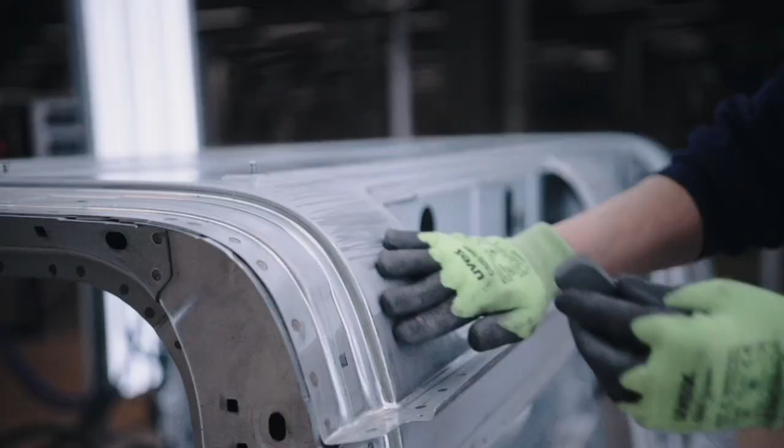This huge factory, previously owned by Mercedes, had almost €500 million invested in it a couple of years ago, before INEOS took control last January. Since then, 50 million more has been injected, modifying the plant for Grenadier production. Taking over an existing high-tech facility with a skilled workforce has given the engineers a massive head start. Their focus now is on build quality and production safety, both top INEOS priorities.

The Grenadier production line starts right here in this brand new state-of-the-art body shop, and it's absolutely vast, the size of 6 football pitches, and it's home to 252 robots that can build a complete Grenadier body shell in just 6 hours.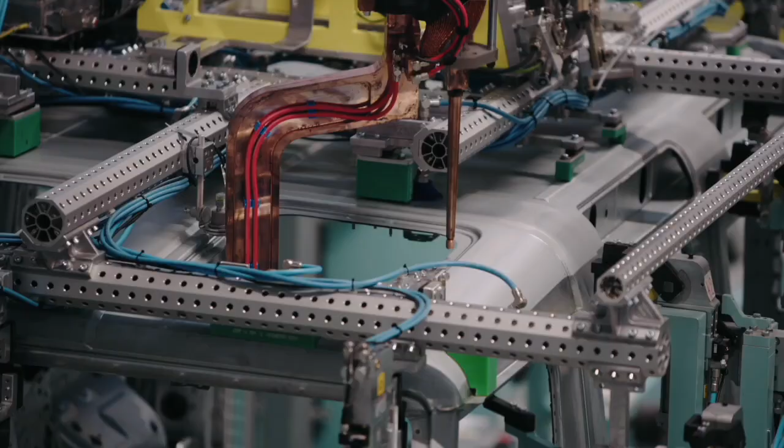So Eric, I remember us having a Zoom conversation a year or so ago when you gave me that tantalising glimpse through the window of your office when you just moved in. You didn't tell me it was this big. Most people when they come here get surprised because even if we explain how big it is, it's very hard to imagine the amount of equipment required to build an automotive body. This is a robotic ecosystem, kind of supported by human beings.

Why have you decided to build these bodies with robots? As you may recall, we bought the plant from Mercedes, and that's the reason why we have this to start with. So we started off with a plant that was the most modern in Europe, and now we have improved on that for the Grenadier. So it is state-of-the-art, but compared to the rest of the motor manufacturing industry, is this right at the top in terms of tech? This is right at the top. This is the newest body shop in Europe right now.

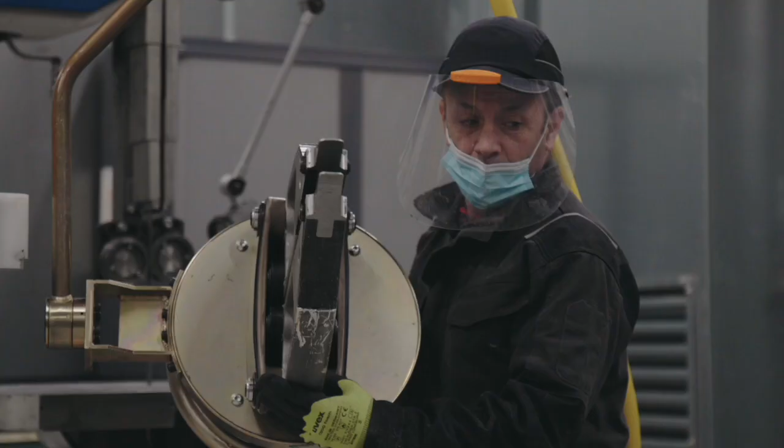So when production's up at full capacity, how many do you pull off to do the more invasive testing, the destructive testing, the ultrasound? It's not every vehicle, obviously. So in the beginning of the process, you make more tests. When you have a stable process, the quality department then defines how many tests you're going to be doing. Inline testing in the machinery is, of course, done on every vehicle coming out.

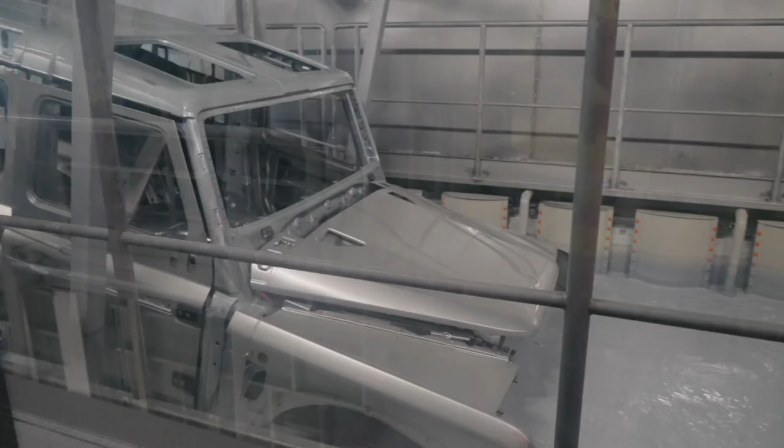So let's move on to the paint shop. Just talk to me about the paint shop. Again, another brand new state-of-the-art facility. It's as environmentally friendly as it can be. It's a water-based paint shop. It's state-of-the-art electrocoating, state-of-the-art paint process. And what is specific for this paint shop right now is that the sealant we're putting on the body to ensure water tightness for wading is of course something more advanced than you would find in a regular paint shop.

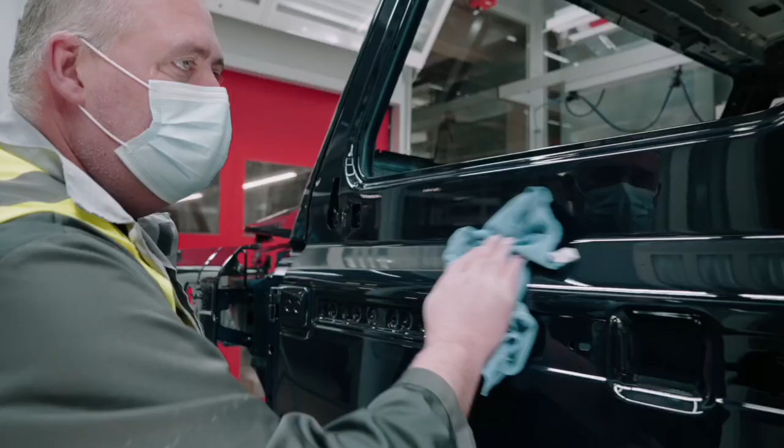Obviously there was a lot of discussion a year or so ago when you made a decision to pull out of the factory in Wales and in Portugal, and you decided to come here. Why Hambach?

Then the opportunity came up that Mercedes-Benz had a change of strategy and said, look, we've just invested, we want to do something different due to COVID and other areas. We took a look at the site and it's just a fantastic site. Also within the Mercedes-Benz universe, it always has been a high quality site.

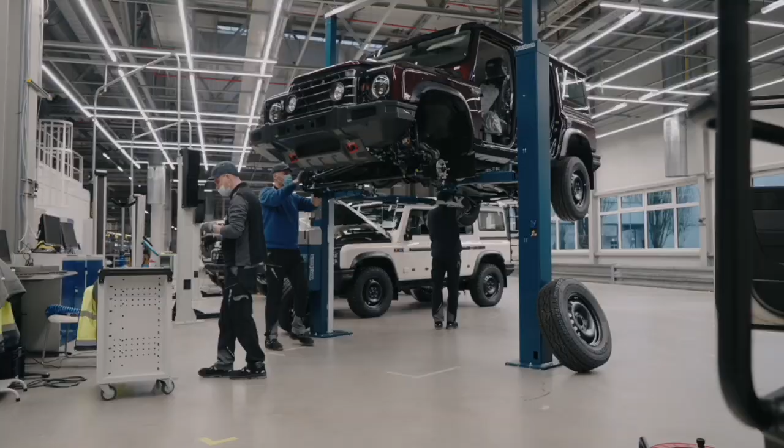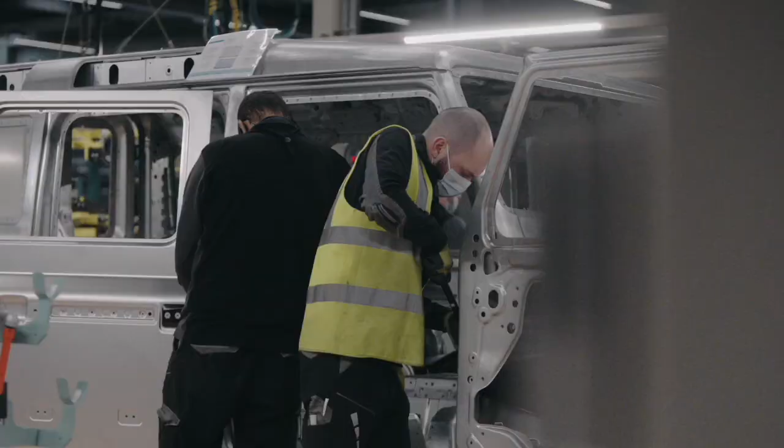Excellent team with a good track record of producing vehicles for Mercedes-Benz, and it just accelerated our capability massively. In hindsight, looking back now in the first year, I could point to so many things we would have struggled with significantly - parts availability being one, training of individuals the other. Walking in here, it just kicked up the quality so much for the product. So also tapping into that experience, having people from the site who manufacture vehicles looking over the Grenadier and giving it just that extra kick.

Because when you walk round, my first visit here, I was thinking it would be, you know, you'd be unpacking crates of robots and whatever, but it's really, really motoring here. Ever since we've taken over, we've been modifying the site. We inherited a site from Mercedes-Benz, which was already well invested. So for us, it was the task now to assess what's here, what needs to be modified and adjusted to build the Grenadier, and that's what we've been doing the last year.

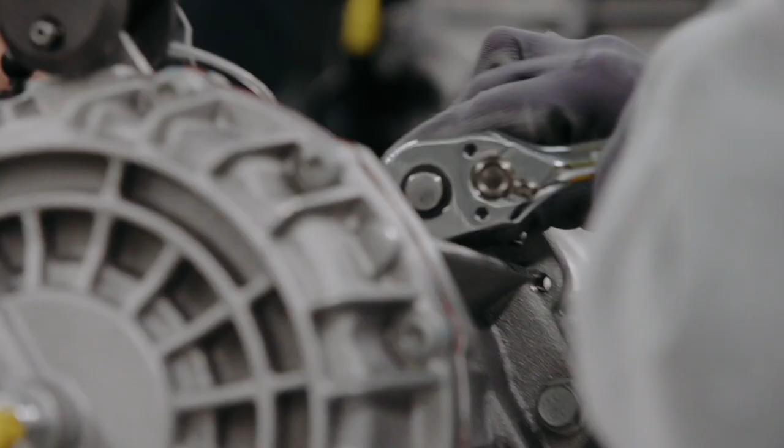So what are you actually building in here in terms of Grenadier? We are currently building the first prototypes of the Grenadier, the so-called PT01 cars, so 120, 130, that will be produced until the end of February.

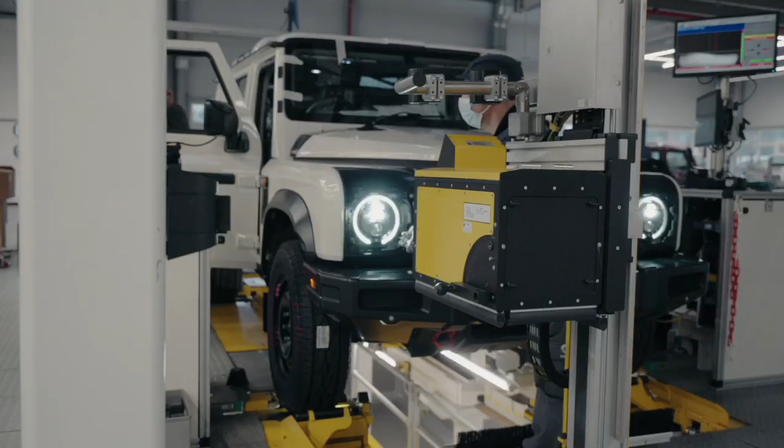So what's the point of these production tryout vehicles? Is it just to test the actual process of building a Grenadier? What we have to do in this phase is really to commission and to test all the equipment that was installed in the last 6 to 8 months into the plant in all 3 shops. Now the project is hitting reality and we have to really see if everything that was planned is working according to spec. We have to check if the buildability of the parts is also mature enough for serial production. So that's really the phase we are currently in.

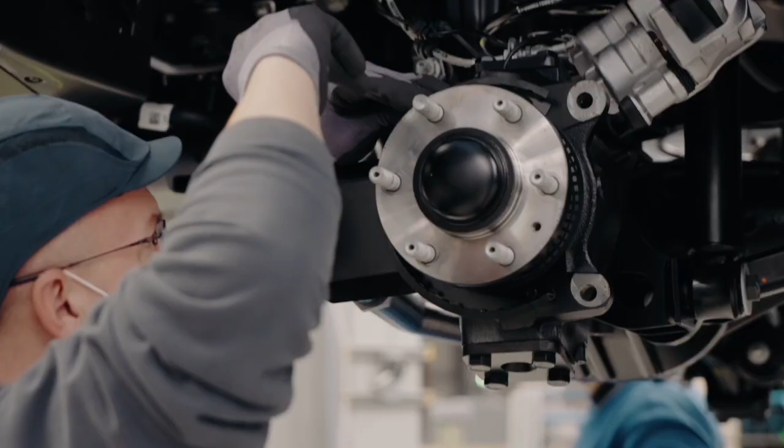So it's interesting how you do that from my point of view. So the engineers build the early prototypes and have a vehicle that they can test and make sure the engineering works okay. Do you then take that vehicle and all the computer files that go with it and say, right, now we need to take it all apart and literally work out how we put every bolt together in a factory environment where we're having to produce thousands of them? Exactly. It's really how to industrialize a car.

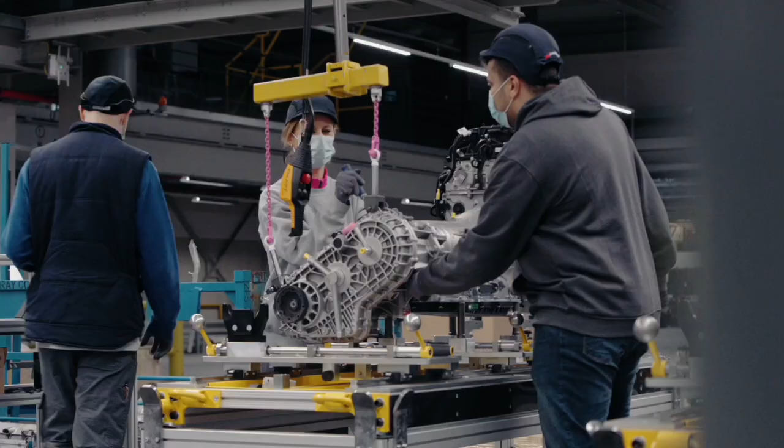Just to give you an idea of the improvement we have to do, we have to check how can we in a plant like this produce really serial production. Currently the output of the line is 1 car every 4 to 5 hours, and by the end of this year we should be able to have an output of 1 car every 5 minutes.

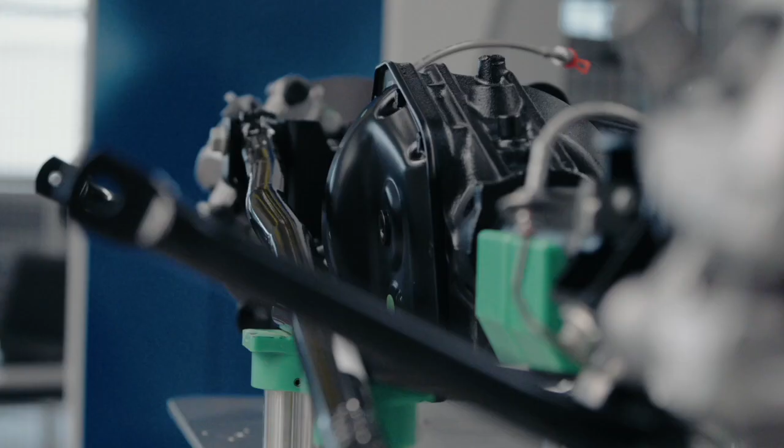So how's it going? Any hitches, or are there challenges that have cropped up? Oh, we have plenty of challenges to overcome. We also need to embrace that and look for opportunities from within there. A lot of it is proving the logistics, proving the individual parts and having them ready to a high standard. I'm confident - we found a lot over the last couple of months, we're still finding things now in how they come together on the line. Confirming what we've seen and adjusting along the way is the game in town now.

The transformation of this vast facility into a bespoke Grenadier production line in under a year is a truly remarkable feat. But the job is not done yet, because at the moment they're only producing about 5 of these latest prototypes each day. But by the time they're building Grenadiers for you and me, the aim in a few months' time is to be able to drive one of these off this production line every 5 minutes.